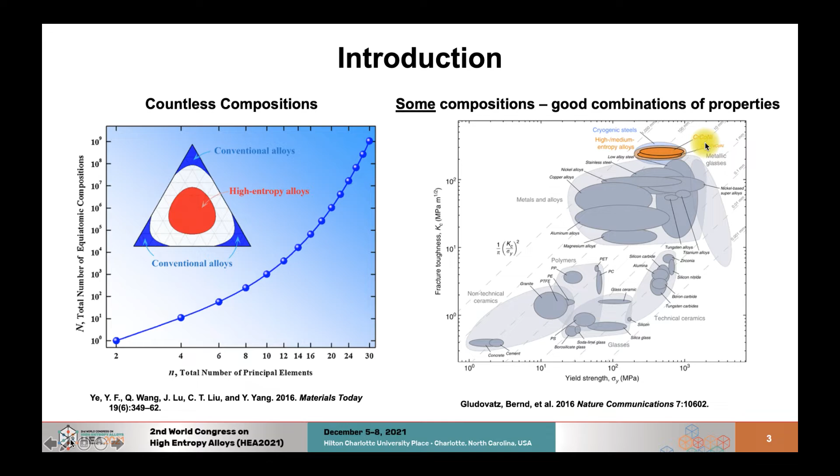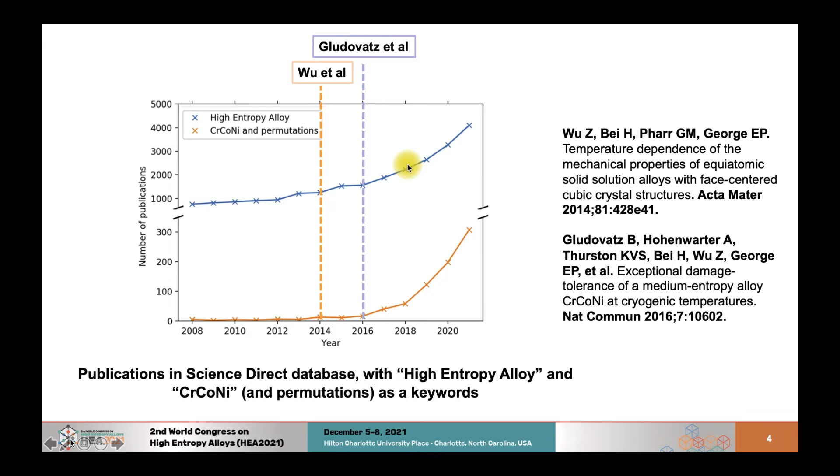And then at 2016, after this paper by Gludovatz, probably one of the most cited papers in the HEA literature, which showed, among other things, this diagram that shows that chrome cobalt nickel is one of the toughest materials ever made among any material. So that's really when the publications in this field started to grow very, very quickly, at a higher rate than, for example, other studies in the high entropy alloys field as a whole.

So just a brief overview of the phase equilibrium of the system. For chrome contents from 40 to 50%, we do display a large FCC single phase field, especially at high temperatures. By decreasing the temperature, we start seeing the chrome-rich phases, which are the BCC and sigma. Sigma is more on the chrome cobalt side. The phase fields where they are stable grow. And at even lower temperatures on the cobalt chrome side, HCP phase forms.

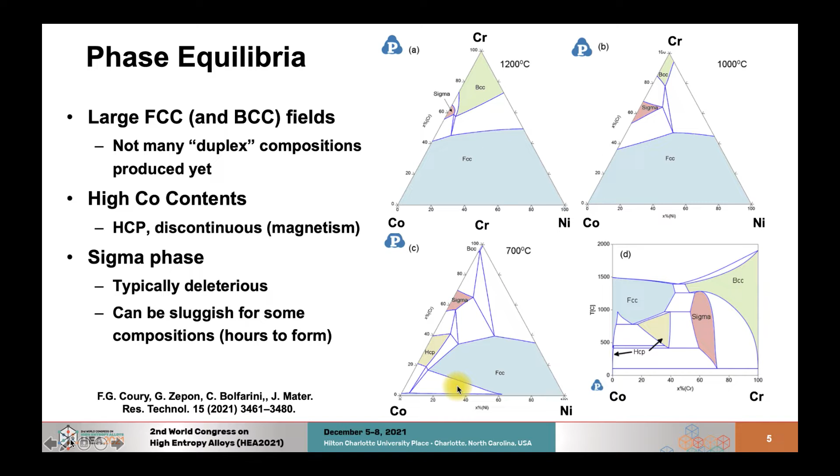So this HCP phase is discontinuous. It's present for almost pure cobalt and for cobalt chrome alloys. And the FCC phase decomposes into two FCC phases at some temperature. This is due to magnetic effects, and to our knowledge, this part of the phase diagram has not been explored much in the sense of mechanical properties. So this is an area that people have not performed a lot of studies on.

So moving on to strength and deformation of these alloys, I'm going to start talking about tensile properties. And one thing where these alloys show really promising results is grain refinement strengthening. So on the equiatomic chrome cobalt nickel alloys, we know at least 3 studies have been done to identify the Hall-Petch constants, so the effect of grain refinement on the yield strength, and they diverge. The studies give some reasons for that based on impurity concentration, and we're going to talk a little bit more about this on the very last slide of this presentation.

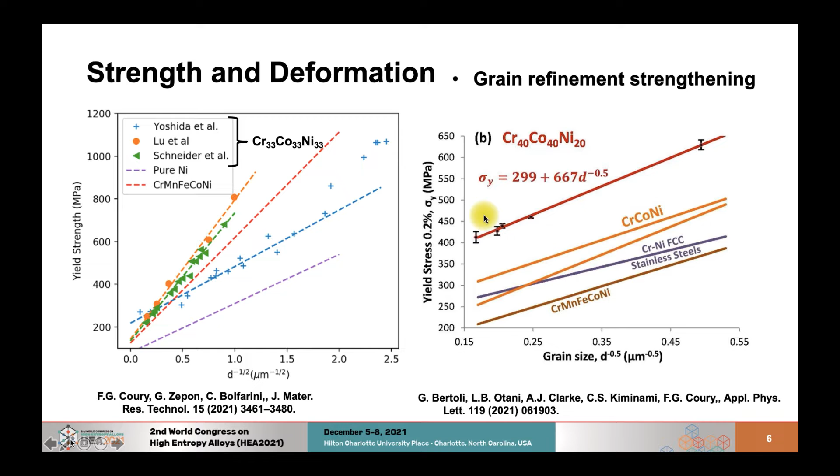And on the non-equiatomic compositions, some studies have also been performed. I'm giving here an example of a higher chrome alloy, and I'm going to talk a lot in this presentation about higher chrome-containing alloys. And basically summarizing these results in this table, what we see is by increasing chrome, we get a higher intrinsic yield strength, the sigma 0 term, and also higher Hall-Petch grain refinement constants. So this is very interesting and points to higher chrome contents being something interesting.

So we can see here an alloy without chrome has a very small sigma 0 and a relatively small Hall-Petch grain refinement constant. And when we go to the equiatomic composition, both these constants go up, and when we go to this alloy that has even higher amounts of chrome, both these constants go up. I'm going to come back to the sigma 0 term soon, but this shows that these chrome cobalt nickel alloys not only are intrinsically strong, but they also can benefit greatly from grain refinement. So studies on techniques and alloying additions to help further increase grain refinement are welcome in this area.

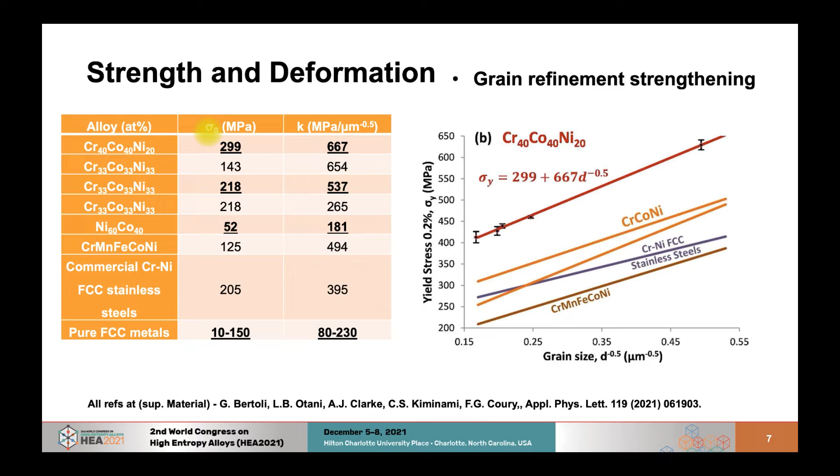And regarding solid solution strengthening, so the sigma zero term, that trend I just showed can be well explained by Varvenne's model. So this is Wu's work that I mentioned, that was the first study to really report these compositions. They show that chrome cobalt nickel alloys are stronger and do display a better ductility than other Cantor alloy derived equiatomic compositions, as shown on these two curves.

And basically what Varvenne's model shows, that is probably the most widely used solid solution strengthening model for high entropy alloys, is that there are two things that really control the yield strength of these FCC materials: the shear modulus and the atomic size or the atomic volume mismatch. So the bigger these two terms, the higher the strength. And this term especially varies a lot from alloy to alloy.

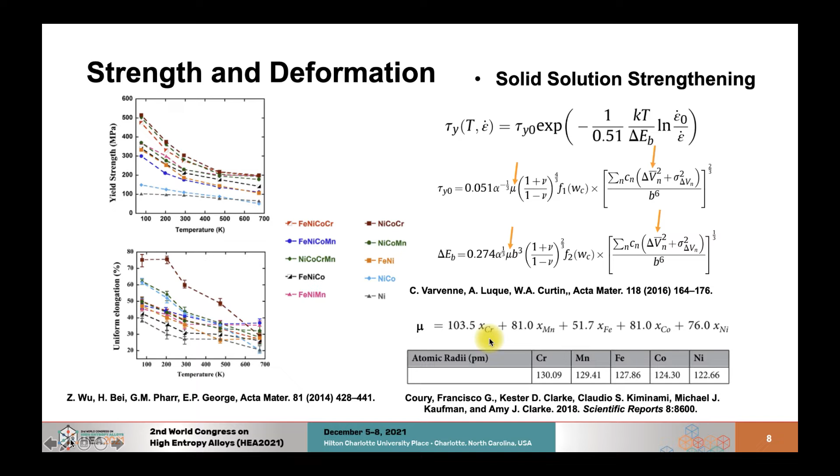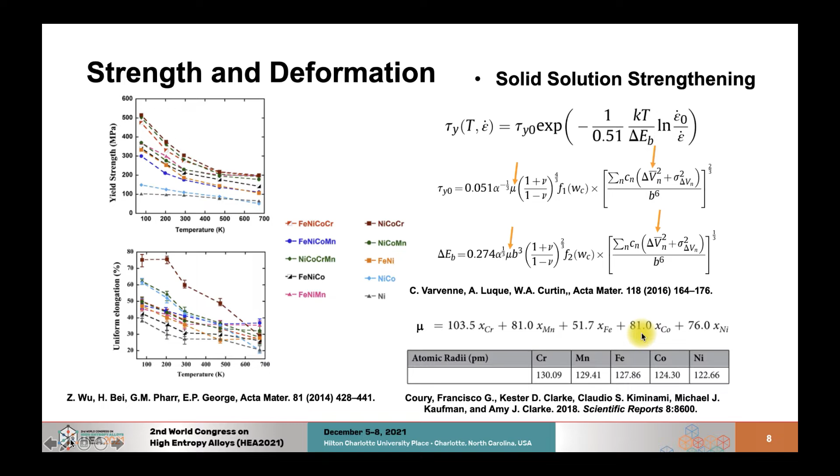And what we show here is that chrome is the element that apparently increases the shear modulus the most, but even more important, when we have chromium, that is the biggest atom in this system, and we mix it with cobalt and nickel, we get a very large delta V here, which is the atomic volumetric mismatch. So this is better shown in this picture here.

So here we have 50 nickel, 50 cobalt, and here we have chrome, and this end is manganese. But we're really interested in this line. What we see is when we go from nickel, cobalt, and we start increasing the chrome content, the predicted strength by Varvenne's model goes up to about 50% chrome.

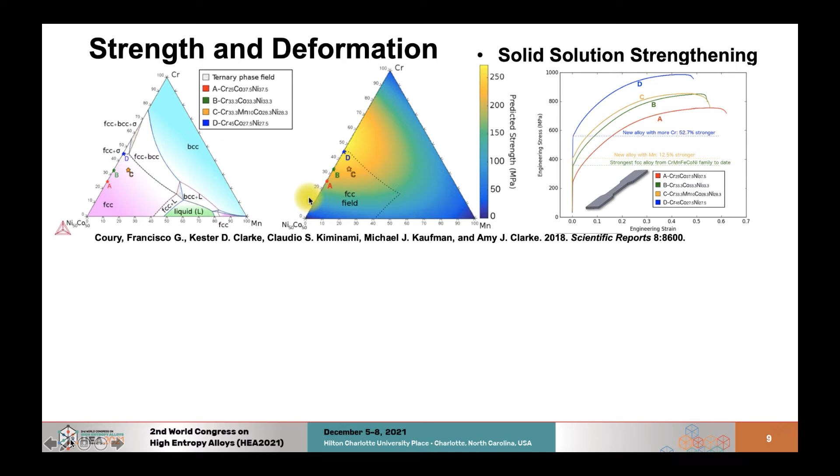We cannot get there because the FCC single phase field ends before that, but we can get to 45% chrome, for example. And this trend shows us that when we go from 25 chrome to 33, which is the equiatomic composition, to 45, the yield strength should go up. And that's what we observe here. When we produce these alloys experimentally, they're all FCC, and we see that trend experimentally. So higher chrome contents increase the solid solution strengthening, mainly via atomic size mismatch.

And this is also well shown by this study that we performed on a diffusion multiple. So this is basically a compositionally graded sample that has cobalt nickel on this end here, iron manganese on this end here, and chrome down here. So we can clearly see that the highest entropy region does not match at all with the hardest region. So this is all single phase FCC.

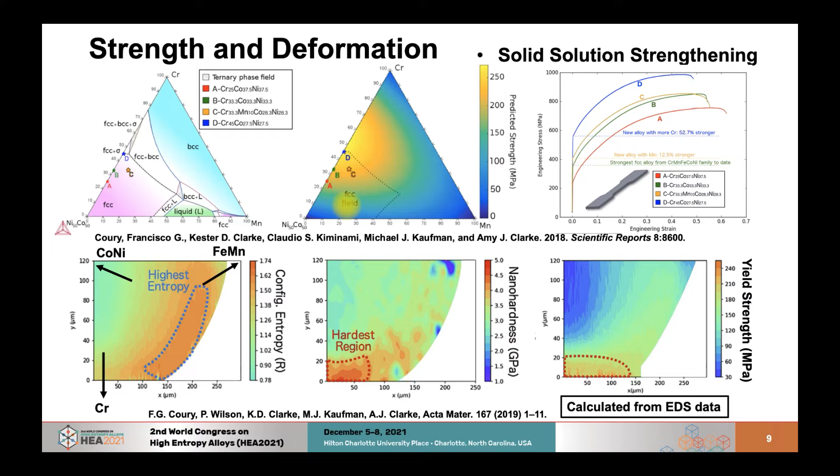And we see that the strongest region is really when we go from cobalt nickel to chrome, as shown by Varvenne's model. So in this figure here, we basically took EDS data from the whole area and applied Varvenne's model, and we can see that it explains the experimental data very well. So we really think using these types of predictive models is a very strong way to develop new alloys.

I'm not going to talk in this presentation a lot about precipitation strengthening. I would invite everyone to watch Diego Santana's talk. I'm going to move on to deformation mechanisms. That's another very interesting topic of these alloys. So by changing compositions, we can go from dislocation glide only to the TWIP effect and TRIP effect.

So this figure was plotted using this empirical equation for stacking fault energy proposed by Gustavo Bertoli, by fitting about 20 experimental data points of stacking fault energy. And what we basically observe, all these dots here are experimental alloys, is that the trend seems to follow more or less what we see for steels.

So when the stacking fault energy is between 15 and 45, we tend to see a lot of TWIP. This does not mean that it's TWIP exclusive, but what we call here TWIP dominated, when we see a lot of deformation twinning. And when we go to a lower stacking fault energy of 15 and below, we start having much more TRIP, so transformation to the HCP phase.

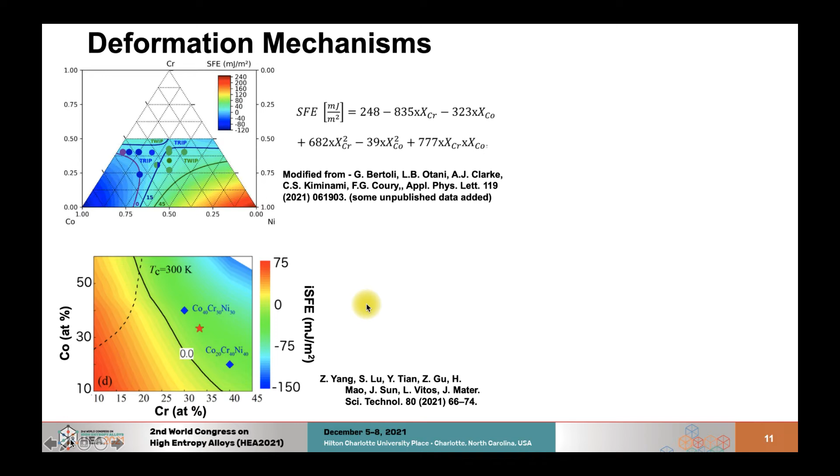This is also well shown by DFT calculations. So a similar trend is observed for the intrinsic stacking fault energy. This paper derives relations for other stacking fault energies. I recommend reading it for more details.

And the reason why I'm saying that these alloys are not TWIP exclusive is, for example, it has been shown that for the equiatomic composition, we do have a fraction of HCP phase forming. It seems to not be very large since it's hard to detect by X-ray diffraction. It's always very refined, and it is well shown by HRTEM, but conventional TEM and XRD techniques have trouble detecting this HCP. So that's why we call these alloys TWIP dominated and not TWIP exclusive.

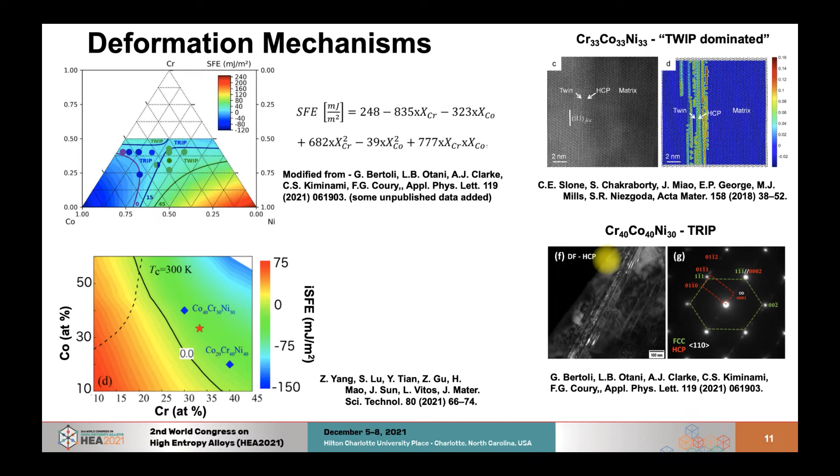And when we go to the lower stacking fault energies, for example, this one, which is 40 chrome, 40 cobalt, 30 nickel, then we do observe much larger HCP fractions and thicker plates observable by conventional TEM and selected area diffraction patterns.

And the effect we expect these deformation mechanisms to have on these alloys is similar to what we see on TWIP steels or TRIP steels, for example. Here, for example, is an in situ study on this composition, which is TRIP. And basically, what we're doing is the tensile test with synchrotron X-ray diffraction. And what we're seeing is when we have the TRIP onset, the work hardening rate stops decreasing.

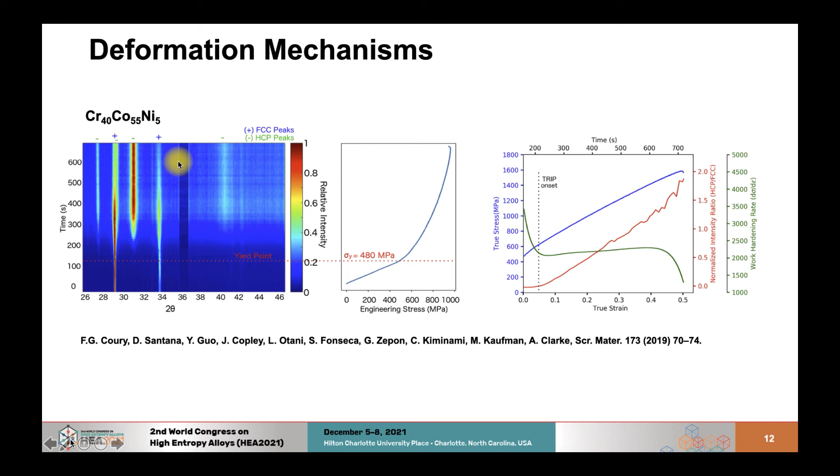So this, thinking about Considère's criterion, will postpone the uniform elongation instability point to higher strengths, making the alloy more ductile. So more studies are always necessary to show particularities of this system, but this is the general explanation. Just one comment on short-range ordering.

This is probably the most controversial topic for these alloys right now. There are some great studies showing experimental evidence of short-range ordering and effects this will have on mechanical properties and the dislocation structure of the alloy.

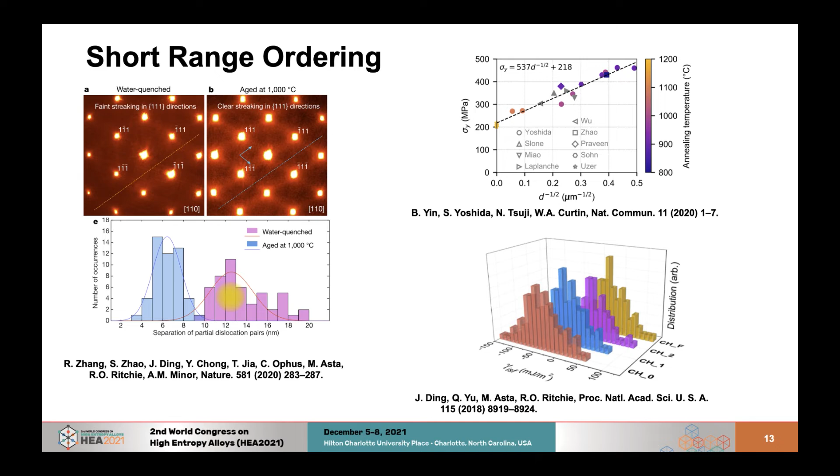And there are other great studies also showing that without evoking short-range ordering, most of the literature results can already be explained. So more studies in this area are being performed and are welcome, since this is a very open topic right now. And one particular area of interest is the discussion of how local atomic environments impact dislocation motion and the separation of dislocation partials.

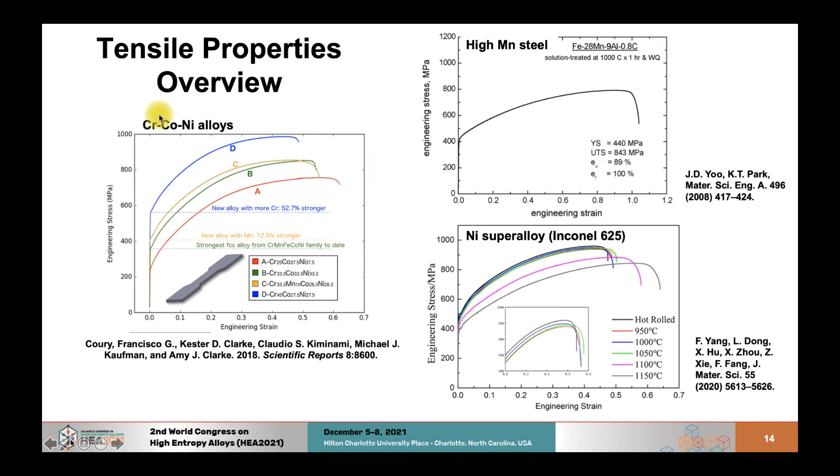So moving on, one very important thing we should note here is that looking at the tensile properties alone of these alloys would hardly justify any application. And the reason we say that is because if we compare the tensile stress-strain curve of these alloys with, for example, some austenitic high manganese steels or some austenitic or gamma nickel superalloys such as Inconel 625, we see that these alloys are good, but would hardly justify the high cost, especially due to the high cobalt contents. So we really need to look beyond tensile properties alone to justify their application.

And one of the first, that is really what has attracted most people, is toughness. So the Gludovatz paper I already mentioned shows this very well via fracture toughness CTOD measurements, and they show that these alloys have very large and very impressive fracture toughness that goes up when we go to cryogenic temperatures.

It's interesting to see that with Charpy impact testing, where the strain rate is much larger, the absorbed energy goes down as temperature goes down. So they do a nice discussion of this, so the trend is somewhat inverse, but nonetheless, the absorbed energy is very high, typically larger than what you see for conventional materials and also other HEAs. So the toughness of these alloys is very, very large.

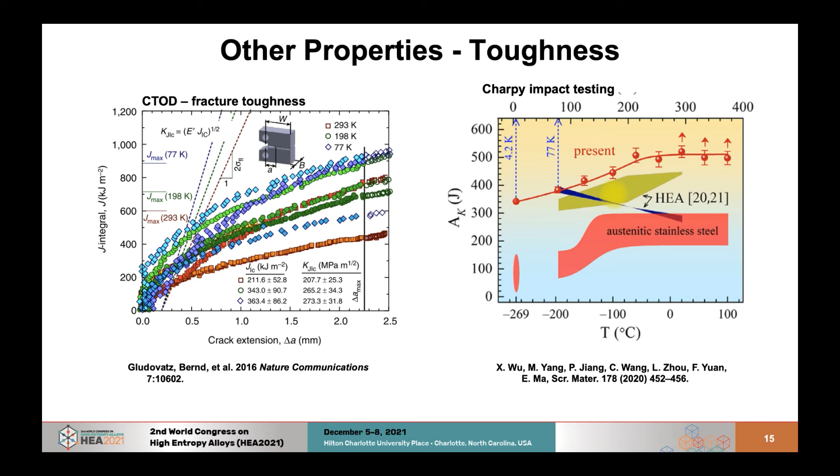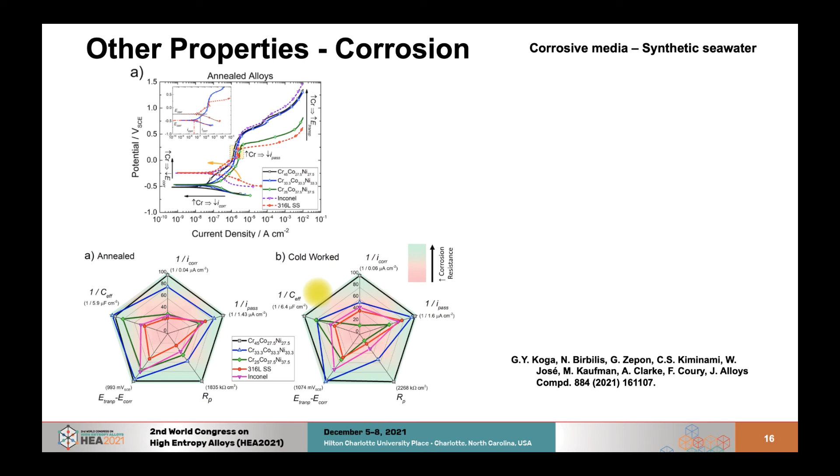And most of these alloys, especially the ones with higher chrome, are better than Inconel 625 and stainless steel. So this alloy, the Inconel, is a benchmark alloy for corrosion resistance, and these alloys are much better in terms of corrosion resistance than Inconel. And what's also very interesting is when we put some cold work, 40% rolling deformation, on them, we see that some of these corrosion parameters go up. So this alloy displays a great corrosion resistance in an annealed and cold worked condition, which is very interesting.

So this is an area where these alloys really excel. So the combination of toughness and corrosion resistance is one area that could justify it. It's much better than, for example, nickel superalloys, and it's an area that could justify applying these alloys.

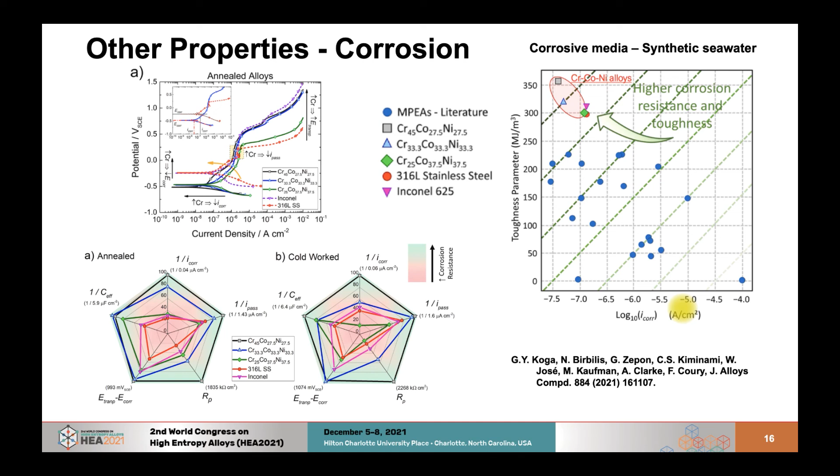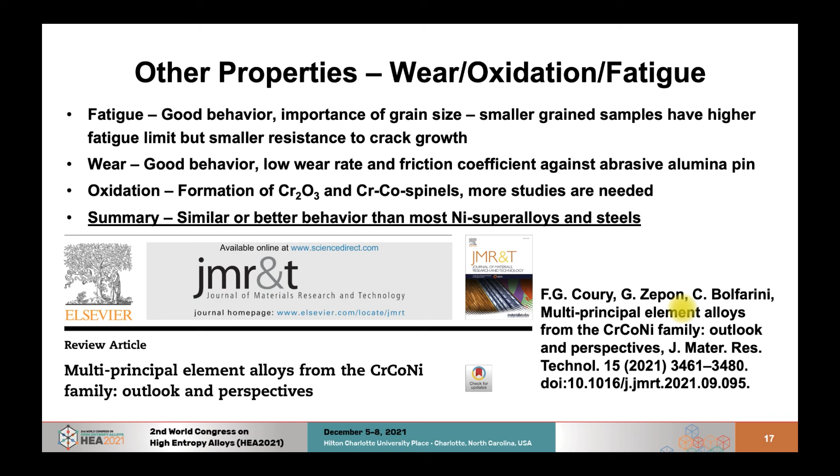There are multiple studies on other properties. I'm not going to go in details. I invite you to read a review paper we recently published. Just a summary: on these other properties, wear, oxidation, fatigue, these alloys do not underperform most nickel superalloys and steels. So it's always similar or better, basically, on those properties.

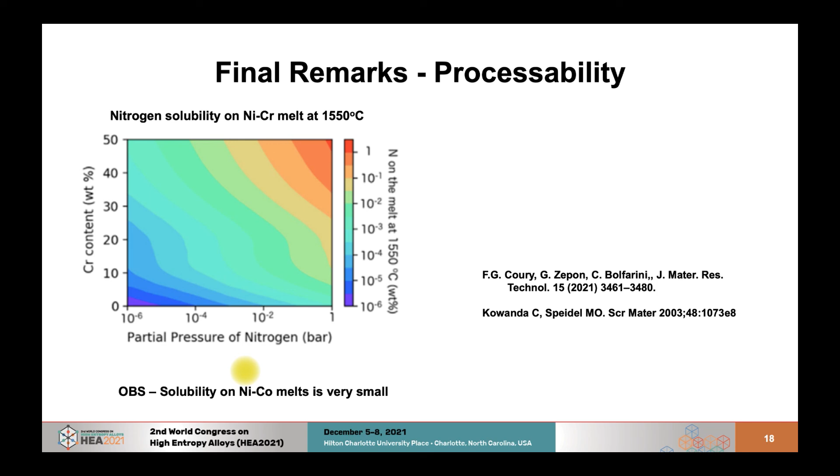So a lot of these works that are being published that are not reporting the nitrogen content might have different levels of nitrogen, and that could really impact all the properties we've seen today. So one important takeaway, in our opinion, is that reporting the nitrogen content of these alloys is very important. So I'm not going to read the conclusions here for the sake of time, just a summary of what we talked about.